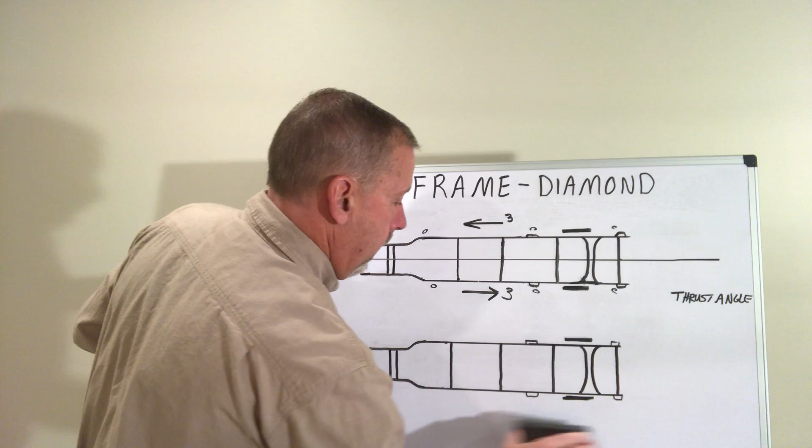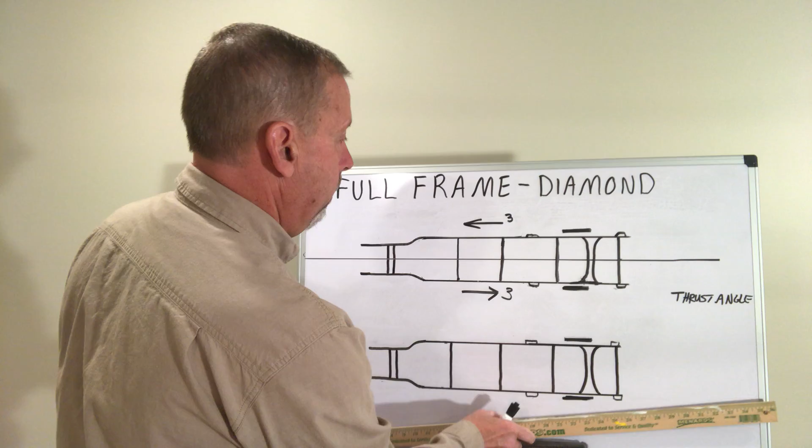So what you're going to do to anchor this, if you're on a frame rack and you've got the dedicated truck clamps, that's the best way you can do this. It's the easiest way. And like I said, you won't even need your pulling power, your towers to pull this. Everybody, myself included, that's how I used to do it. You would try and anchor this thing down, get a chain somewhere back here on this side of the rail, and pull that way, or anchor it, and put your power post up here and try and pull this way, and you're going to stretch it.

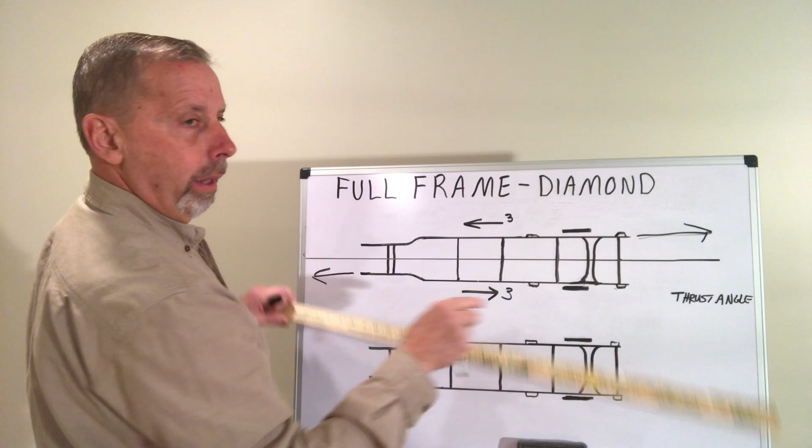You're going to get it back, but what happens, these chains and all that power are just going to try and equalize everything, and it's going to want to just twist that frame around. So everything that you did previously to get this all squared up and running in center, you just ruined all that. It's going to throw everything off. It's going to bend everything back out of place. Your center line is going to be way off. That's the only thing that's going to happen trying to do it that way.

And I've struggled with that for years, years ago before I came upon this other way. You'd try and pull diamond out, and it was usually tough. You really couldn't get them to move much. You'd fight it, and you'd lose your center line, and you'd have to go back and start over.

So what you're going to do, you're going to anchor this frame back, and you have to do this in 2 places. This is going to be somewhere right underneath the flat spot of the frame, the center section there, and you're on your frame rack. Now you have to have those, they're called wrench binders, and you can get them through Auto Body Tool Mart. I looked on Amazon, they don't carry them, and they're kind of expensive. They're about 95 bucks a piece.

They work kind of like the ratcheting chain binders, and I've used those ratcheting chain binders before, and they're okay for just holding a load. You can stretch a chain tight, put pressure on it, but if you want to keep constant power on that thing and keep stretching and tightening that chain up, they just don't work because the threads are just too heavy.

The wrench binders through Auto Body Tool Mart, they've got a finer thread to them. They've got a hook on both ends, and they come with a wrench, and you can turn those things and get a lot of power out of them. So you need to put one on this chain, you put a binder there,

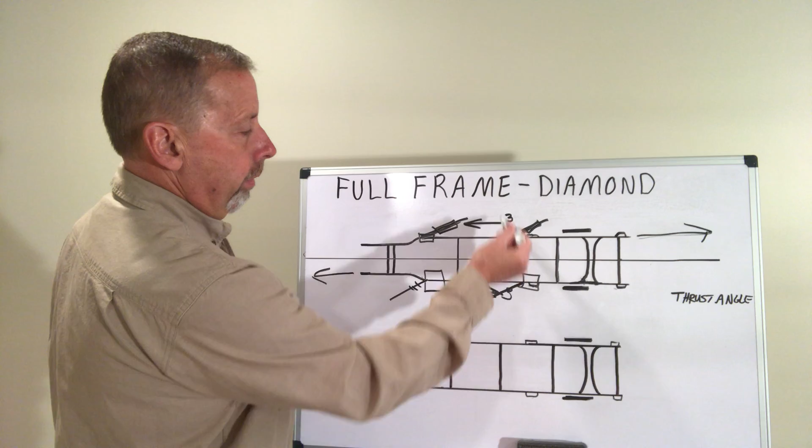So like anything you're going to pull, you're going to over pull it. To get that 3 millimeters per side, you might have to stretch it the opposite way another 2 or 3, but these will work even on 3/4 ton frames. It'll do it. And like I talked about before, your bed bolts should be out, your cab should be loose. You can't have any tension on there holding it in place. And it's surprising how easily you can move that frame.

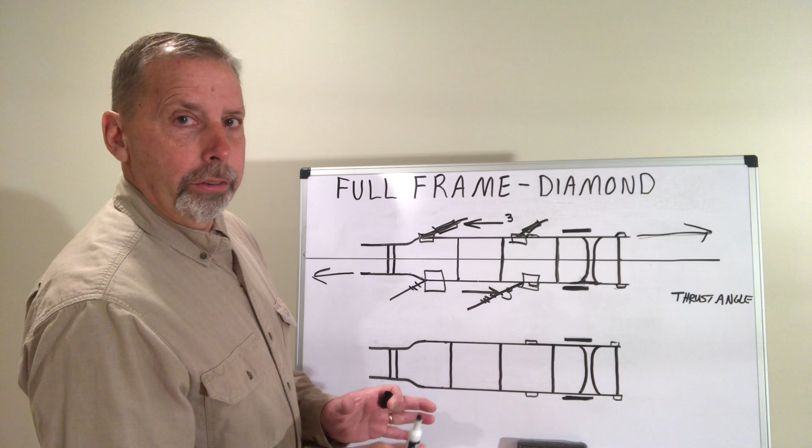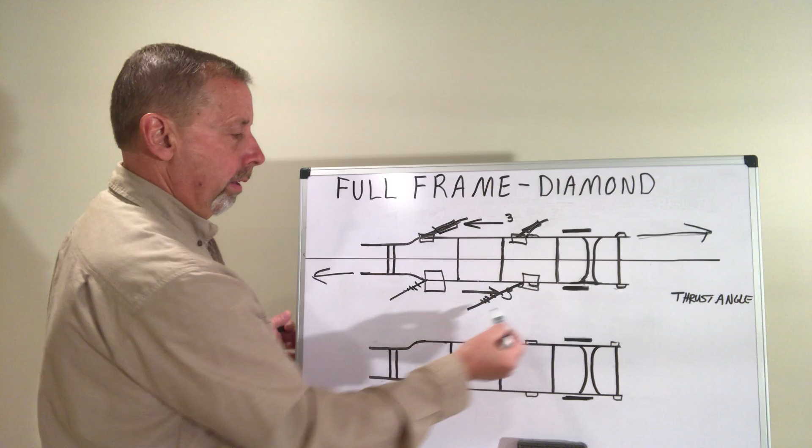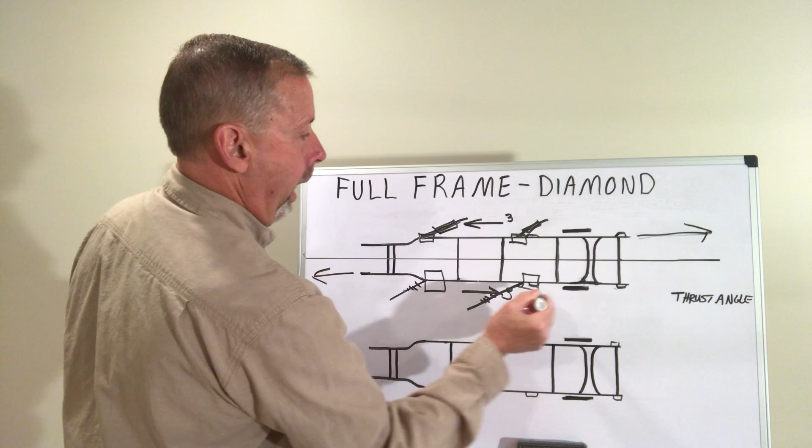So then you can let off of it and check your measurements. If you need to go a little bit more, you just apply more pressure, go past the point you were before. And keep these things nice and tight. Like I said, work them one at a time. And it's just amazing how it'll take that diamond out. It won't affect your center line because you're not pulling or anchoring back here. All you're doing is grabbing the center section.

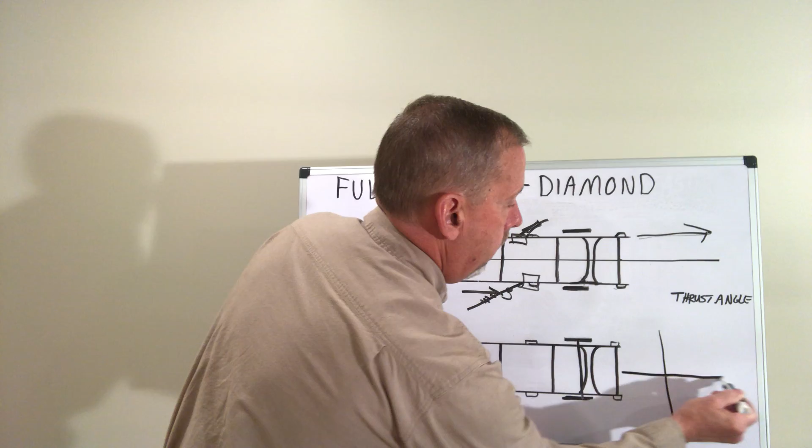Now, I want to talk about thrust angle. That's the most important reason why you want to get the diamond out of it. Thrust angle is the angle of, say, your rear axle right there. Let's do it this way. It's perfectly 90 degrees from the frame, even though it doesn't look perfectly 90. If your rear end has a little bit of an angle because this side is driven back, that angle in there is the thrust angle.

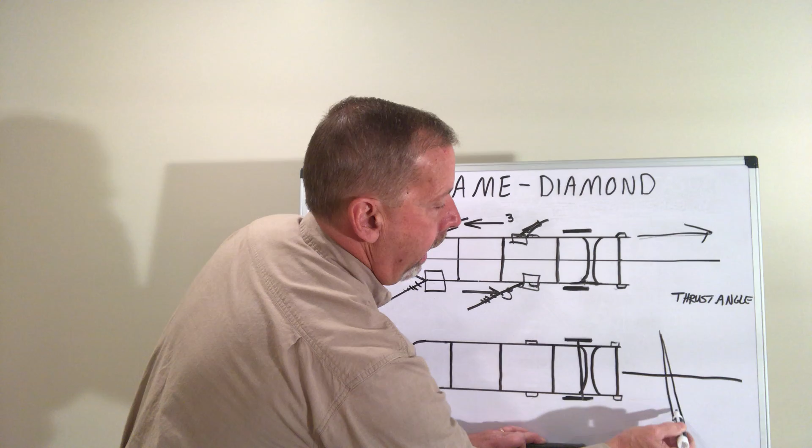Now most trucks go up to maybe 5/10 on the heavy side allowance for thrust angle. Usually you can get them within 2/10, so it's very minimal. So it's very critical to get the diamond out of it to get that axle running perfectly true with the frame. If it's not, it'll throw off the alignment. The back of the truck will track one way or another, and then the front end alignment and the steering wheel have to be adjusted, because it's always, like I say, dog tracking.

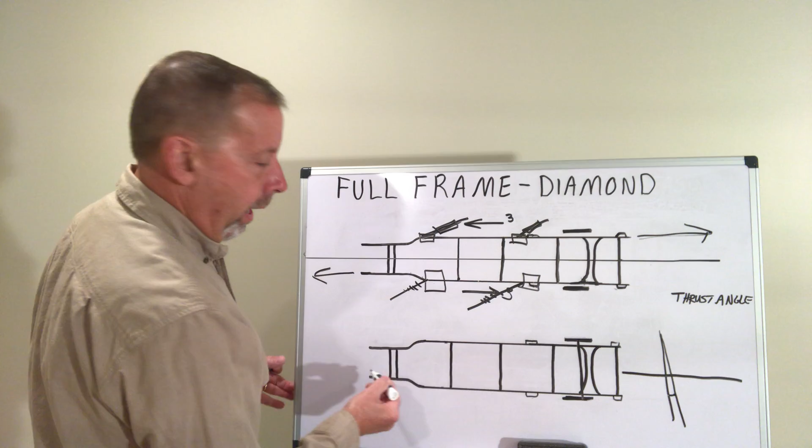I mean, it's so slight you probably wouldn't notice it going down the road, but it affects the whole frame. It affects the front end alignment. So that's why you have to get that thing right on the money. And like I said, with these binders, it's very easy to do. Now, if you don't have them at the shop, they are expensive. Like I said, they're about 95 bucks apiece. But if you use them on just a couple of jobs, it saves you so much time and aggravation. It's worth the investment to buy them.

So once you've got the diamond out, we're going to leave these chains on here for the remainder of the pull, and I'm going to explain why in the next video.